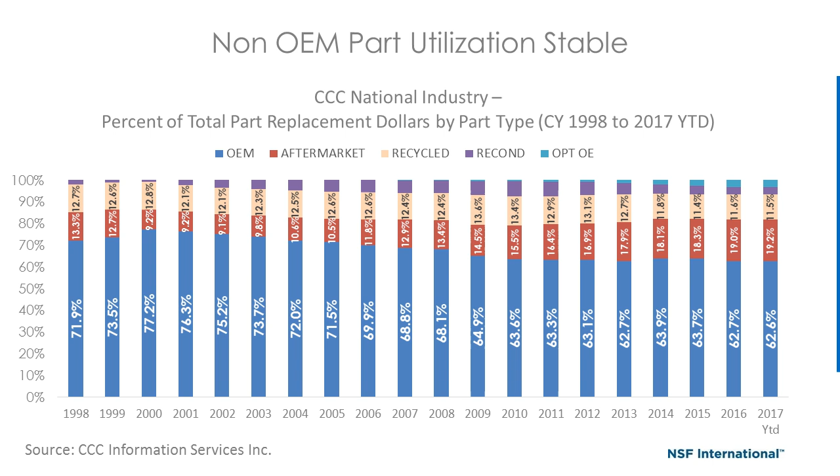So for those of you who don't know NSF, I'm going to do a brief 2-minute introduction. We're one of the oldest, largest, and most respected ANSI accredited certification bodies in the world. I'll talk a little bit more about ANSI and who they are in a bit, but we're a not-for-profit organization. We've been around for more than 70 years, and our ultimate mission is to protect public health and safety wherever we go. We live that mission out by writing certification standards. We have over 90 standards that are published and that we certify to in the world today. For products that we certify, we have testing labs all over the world, and we audit factories and facilities for services that we certify as well.

We have about 2,500 employees, and we operate in over 170 different countries.

NSF used to stand for National Sanitation Foundation. We've been around since the 1940s, right around the time people started eating in restaurants. At the time, there were no collaborative standards for food sanitation, and there were a lot of issues with people getting sick in restaurants. So four professors from the University of Michigan School of Public Health got together and wrote the first NSF standard around food equipment.

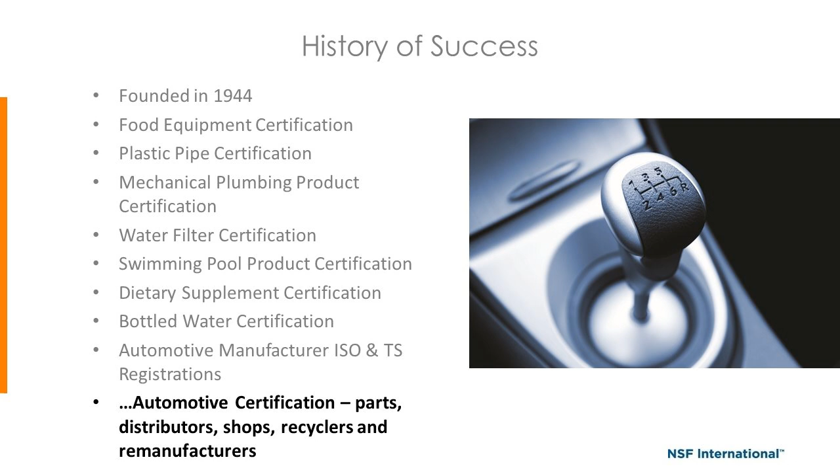One of our philosophies at NSF is really certifying an entire supply chain. That started out, I don't know where the term was coined, but in the food industry we certify from farm to fork. In the same way, we have the same philosophy within the collision space, because at the end of the day we want to assure that consumers have their cars fixed correctly and safely.

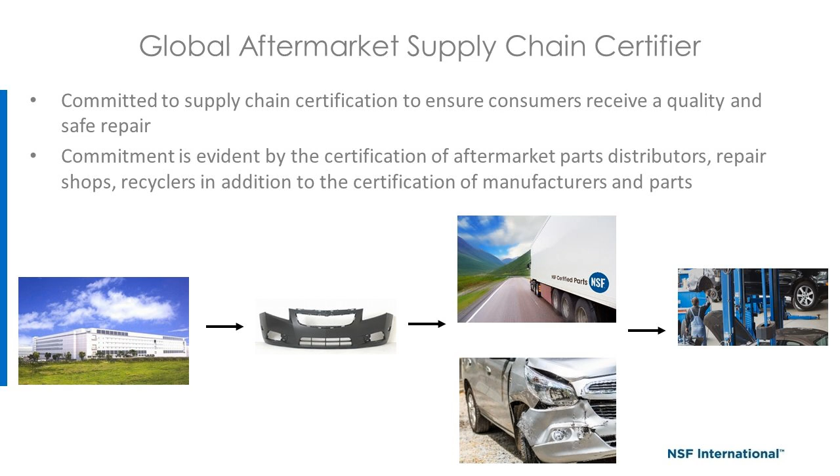It doesn't matter if a car is not fixed correctly because a bad part was used, the wrong part was shipped from a distributor, or the technician did the repair improperly. At the end of the day, the consumer wants their car fixed properly and safely, and the only way to do that is to certify the full supply chain.

The first thing we do before we even get into certification is develop standards that we certify to. One thing often overlooked in a lot of industries is: what is certification? The example I like to give is when I'm interviewing somebody and look at their resume and they've gone to a university I've never heard of. I check to make sure that university is accredited, because I could make up that I have some degree from the University of NSF International, and that won't mean anything because I just made it up. So having an accreditation means something.

In the same way with certification, ANSI—the American National Standards Institute—accredits different organizations. They have to follow certain rules and meet certain criteria in order to write standards and certify products and services. There are a lot of different rules we have to follow in order to maintain that.

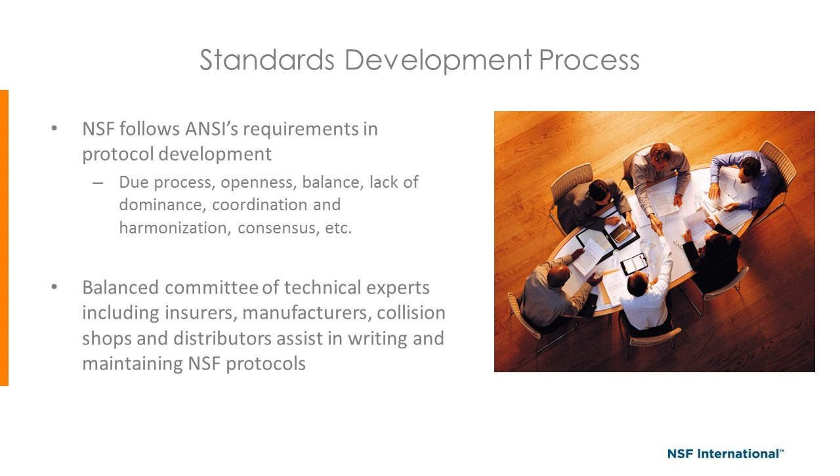When we're developing standards, we have to have an open process. We have to have balance on the committee that develops the standard, so we have industry folks representing the full diversity of an industry come together. There has to be due process and a voting process, where each organization on the committee only gets one vote. Together, the committee comes up with a consensus standard that is used to drive and direct the certification.

Starting with our part certification, I want to quickly walk through what goes into it and what process a manufacturer needs to go through to get a part certified. If a new manufacturer wanted to certify a part, the first thing they need to do is have their facility or facilities approved to make sure they're capable of making parts that will be certified.

A prerequisite is being ISO 9001 or TS certified. It's absolutely vital and critical that they have a good quality management system in place to assure that they not only make good parts, but consistently good parts day in and day out that meet the strict requirements and criteria of what goes into having a certified part.

It's important that we're always certifying parts to be equivalent in form, fit, and function to the OE parts. So it's critical that they have good quality management systems in place.

Once we validate their ISO 9001 certification, NSF will go in and do an additional factory audit to make sure they have quality management systems above and beyond, checking the control plans, checking the records to make sure they're tracking all the different tests required right on the lines where the parts are coming off.

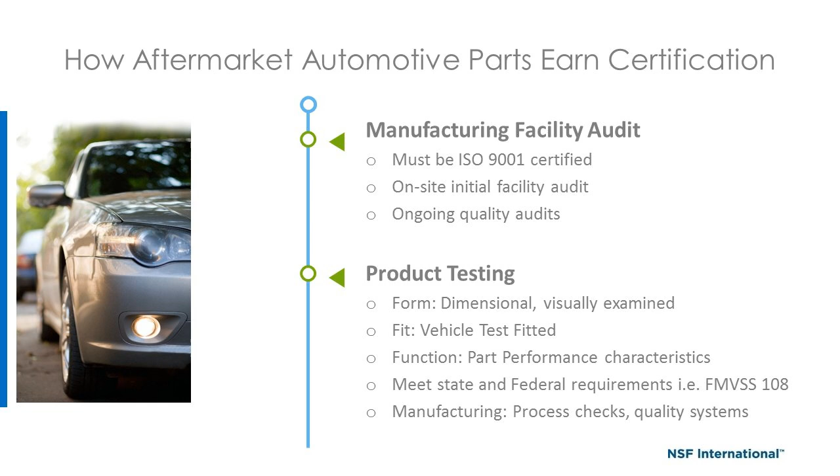Once the testing is completed, all the test reports and audit results are sent to an NSF technical reviewer to make a certification decision. If all the criteria is met, that part can be certified.

Once the part is certified, it goes onto NSF's public listing site, and CCC, Mitchell, and any of the other data providers are notified on a weekly basis so they can update their information accordingly.

In my opinion, probably the most important part of part certification is market surveillance, because anyone who's been in manufacturing before knows it's really easy to make one good part, but very difficult to consistently make good parts on a day-in and day-out basis.

So we do quarterly factory facility audits where we're in the factories again, reviewing the control plans, reviewing all the records being tracked within the internal labs, making sure they're doing all the testing they need to be doing, and when certain things come out of parameter, making sure there's isolation and that parts are being quarantined if they don't meet the criteria and specifications.

In addition, we do in-market testing, where in our Ann Arbor lab we test hundreds of parts that we buy from distributors in the U.S. The manufacturers don't know which parts we're going to select, but we'll buy those parts from a distributor and test them to make sure they continue to meet their criteria.

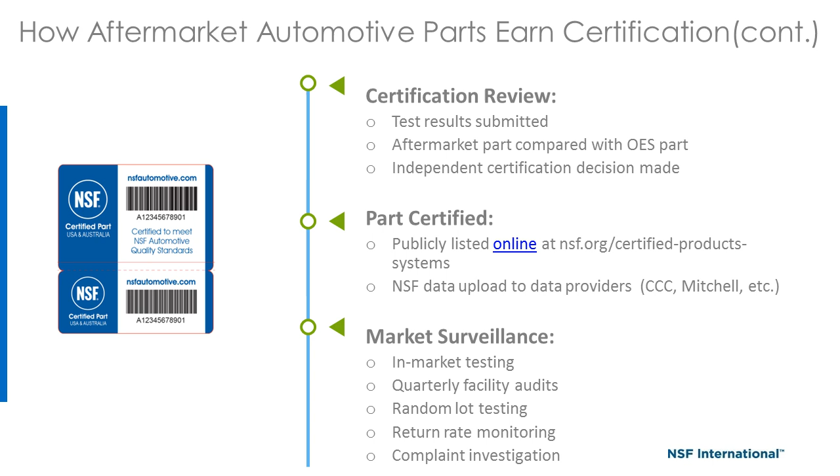We also monitor return rates from distributors to make sure that if anything gets above a 3% return rate—returns related to quality or fit issues—we'll make sure those parts get in-market tested as well. And anytime there's a complaint, we will investigate it and potentially do more testing on that.

Every NSF part will have a tamper-proof two-part label with a barcode that's traceable back to a manufacturer and lot. One of the things we announced at SEMA this year, if you haven't heard, is a new app.

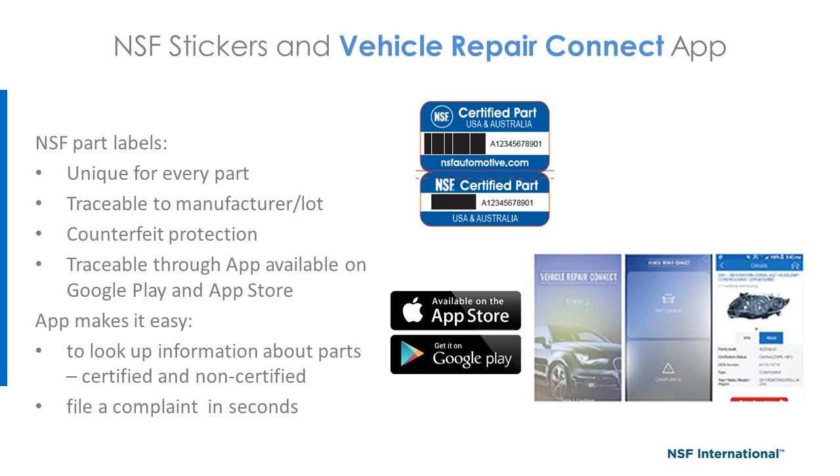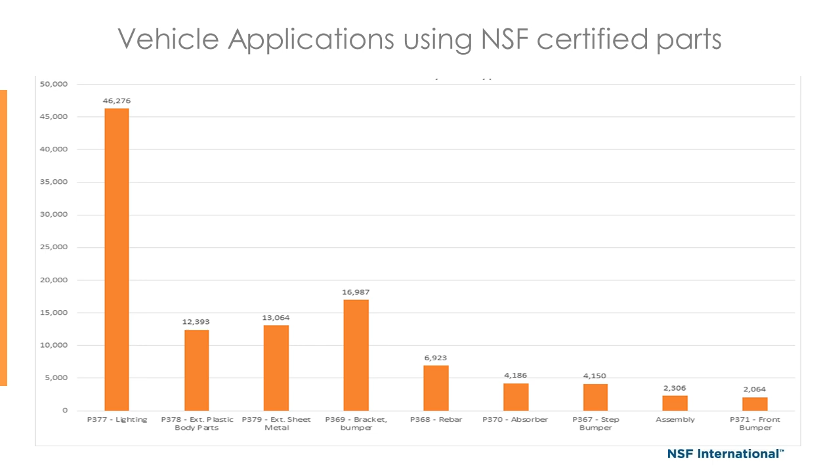Finally, just to highlight benefits of NSF certified parts - it helps the entire industry, all the different stakeholders, just have different options available and drive competition within the industry. Being able to have cost-effective parts that are equivalent to the OE parts makes an impact and reduces the overall severity. It means less cars are going to be totaled going into junkyards, it's going to be more work for body shops, and it really provides a high-level service for everyone that's involved.

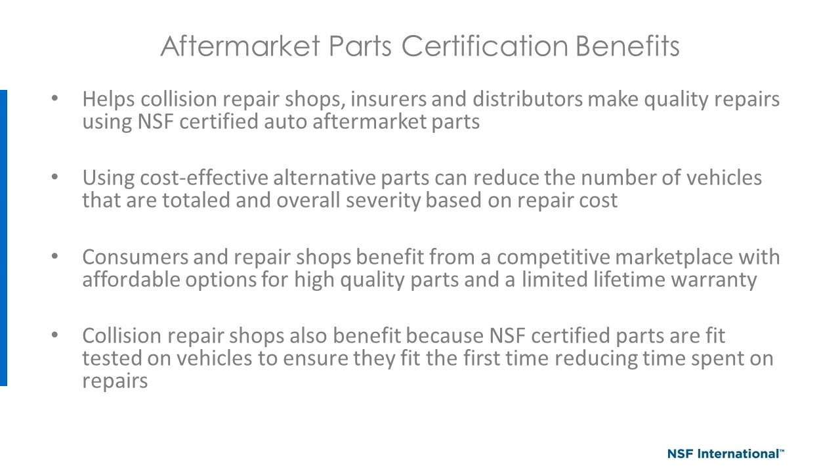Something new that we've found, that we've been looking at over the last year, maybe year and a half, is that the NHTSA FMVSS rules were written over 40 years ago, and at the time the average age of a vehicle on the road was between 5 and 6 years old. So the rules for the lens coating and lens durability was 3 years. What we've seen happen now is the average age of a vehicle is more than double that - it's in that 12-year mark.

What we're seeing some of the OEs starting to do, and some have already done this, is that even though the NHTSA laws haven't changed, they've taken it upon themselves to go to a 5-year coating. So we want to be proactive and do the same thing. We want to make sure we always say that the parts are equivalent in form, fit, and function to the OEs. So starting this year, NSF certified lamps will all have a 5-year coating on them.

One of the things to mention is that when we did a cost analysis on this, it's literally pennies per lamp in cost. So there should not be an additional cost seen anywhere in the supply chain with this, but it should be an added benefit and help the headlamp's durability improve by 60%.

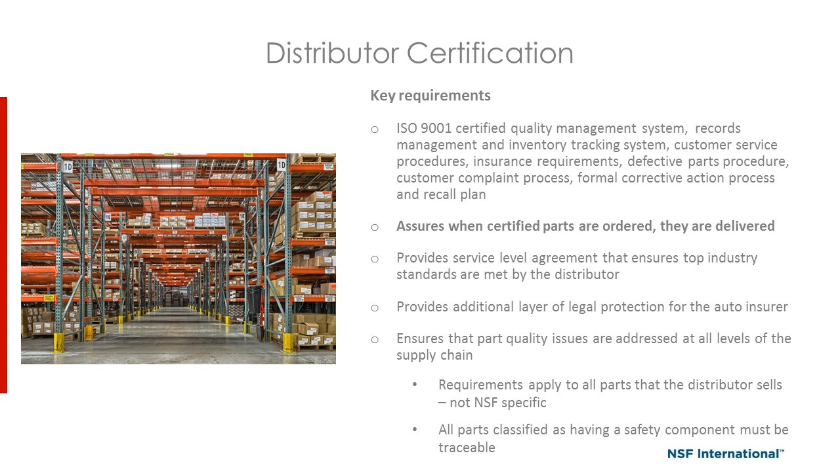We also want to make sure that there's a level, if in the event of a recall were ever to take place, that the distributor has a system in place to be able to track that and to execute around a recall.

I think everyone is aware of and very sensitive to this John Eagle Collision Center case that just took place at SEMA. That seemed to be all that anyone was talking about. It's unfortunate, not getting into specifics or taking sides, but one thing we see on our radar is there's going to be a lot more 'ambulance chasers' out there and more sensitivity around that. So if you're not working with NSF or another organization like NSF for shops, it would be worth being sensitive to that risk, people waiting to jump on something whether it's there or not. Having that extra layer of defensibility is something to consider.

That's really what NSF Repair Shop Certification is all about. We want to make sure shops that earn certification provide a high level of quality repairs and excellent customer service. There are three certification types a shop can earn depending on what they do: cosmetic, structural, or aluminum. The audit really focuses on in-process inspections, making sure the shop has the right training and equipment, the right customer complaint process, but the emphasis is on the actual vehicles, making sure they follow OE procedures and are returned to the customer in a safe and reliable way.

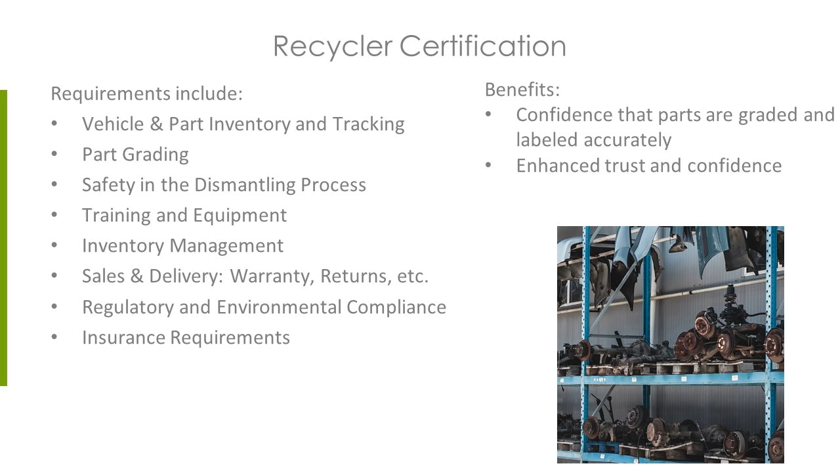We will be launching a remanufactured parts certification program. The first part group we'll certify facilities for is starter motors. Other part types will be available for remanufacturers to apply for in 2018. Let me be clear though: we're not certifying the actual remanufactured parts, we're certifying the facility doing the remanufacturing. They need to be ISO 9001, showing a good quality management system. Every part remanufactured at that facility must be tested and evaluated before resale. Parts are fit tested, looked at and evaluated for appearance to meet different criteria in the standard. Any moving or replaceable parts like bushings, gaskets, O-rings, or lubricants need to be replaced. The core is the part that can be remanufactured.

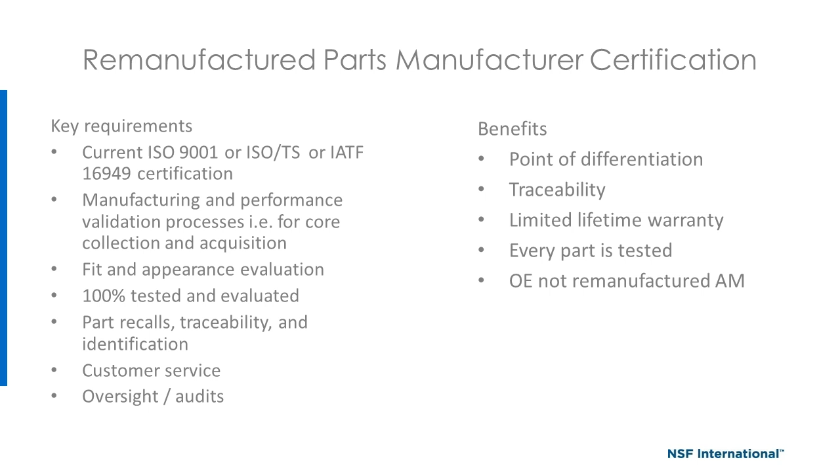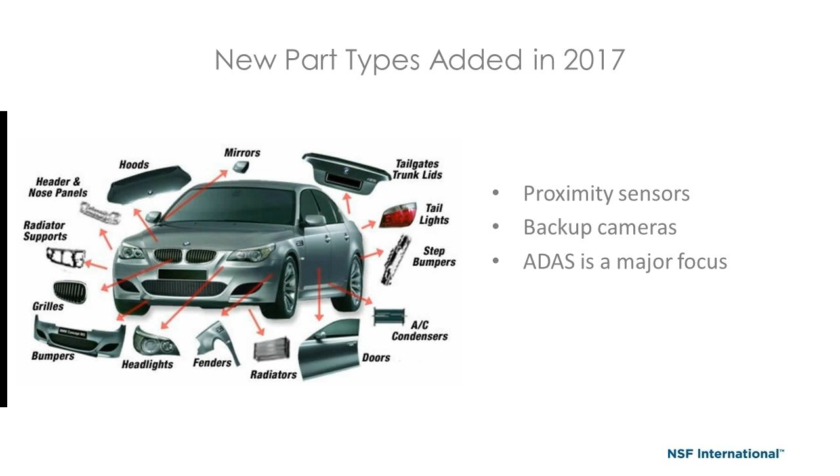In 2017, with all the advancement of ADAS technology, we launched two new certification programs, one for proximity sensors and another for backup cameras. There will be others coming out in 2018 that we'll talk about in the next webinar.

With proximity sensors, there are NHTSA rules and tests required to make sure they're safe and work appropriately, and we test according to those standards. Each factory needs to be audited annually to make sure their quality system requirements are being met. There are physical wear and tear tests, and fit and connectivity tests are done afterward, to make sure the sensors still function in extreme cold, humid, or potentially corrosive conditions. Besides appearance and connections, the NHTSA tests also look at range of detection, response time, and communication as part of the requirements.

There will be a limited lifetime warranty on certified sensors, and they will all bear the NSF mark and be listed on NSF's site. We've received a lot of questions about when we're going to start seeing certified proximity sensors, and we hoped we'd have them by now. Unfortunately, this is new.

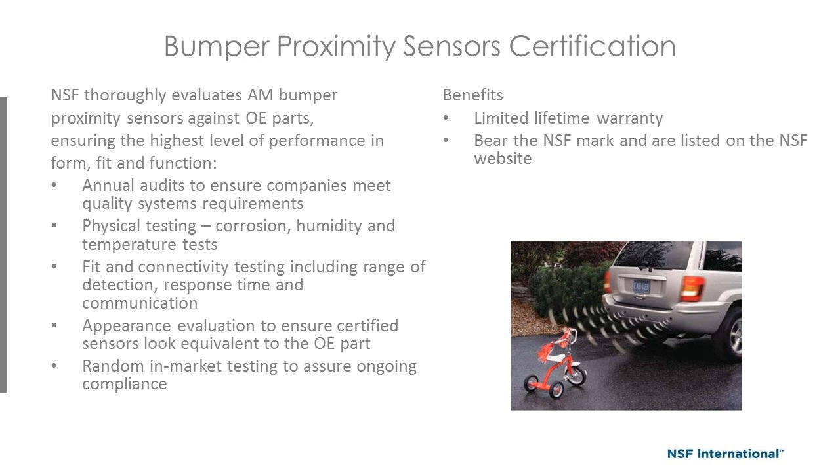For backup cameras, the requirements are very similar to proximity sensors, where you go through your appearance evaluation, you'll do the fit and connectivity tests after the physical wear tests, and again, it's testing against the OE and to the NHTSA requirements.

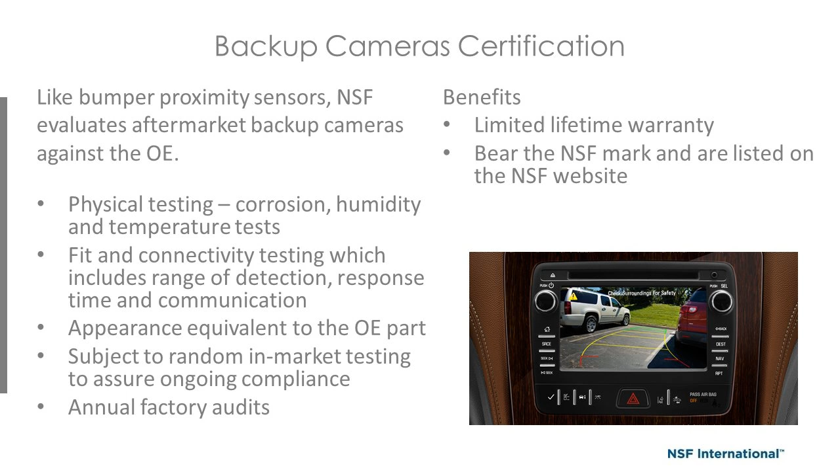NSF has a registration program for certain part types to pass FMVSS NHTSA testing requirements and be evaluated for fit and function. Some of the part types I'll talk about are mirrors and TPMS. The difference between certification and registration is that registration is a much less expensive alternative to certification. It doesn't include in-market testing, and it doesn't involve factory audits. What we're validating is that the design of a part meets certain testing requirements, and we would register a part once it meets those different requirements. So there's less risk mitigation, but it's faster and a less expensive alternative.

For mirrors, we test according to FMVSS 111 requirements. We'll test for field of view, reflectance, mounting, marking, and curvature. We'll also do a vibration test to make sure there will not be blurriness in the mirror, that the glass is seated properly, and check blind spot detection. The other feature we check for is that if an OE has a certain feature on it, like a turn signal light or a defroster or any other feature, we make sure the aftermarket part has that same feature as well.

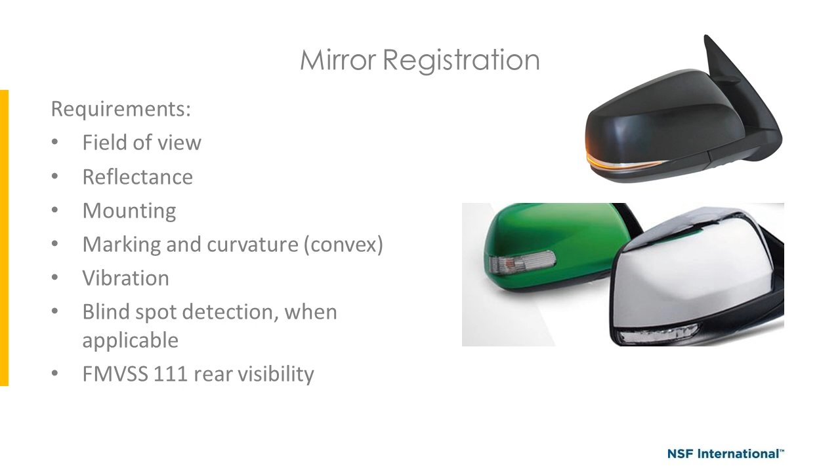Similarly, for tire pressure monitoring system sensors, we test according to FMVSS 138. It's really looking to make sure the sensor ID writes for sensors with cloning capabilities, that the sensor is accurate, that it's reading and registering properly, and that it syncs with the particular protocol, links up and syncs with the vehicle in a timely manner, as outlined in the FMVSS requirement and guidelines.

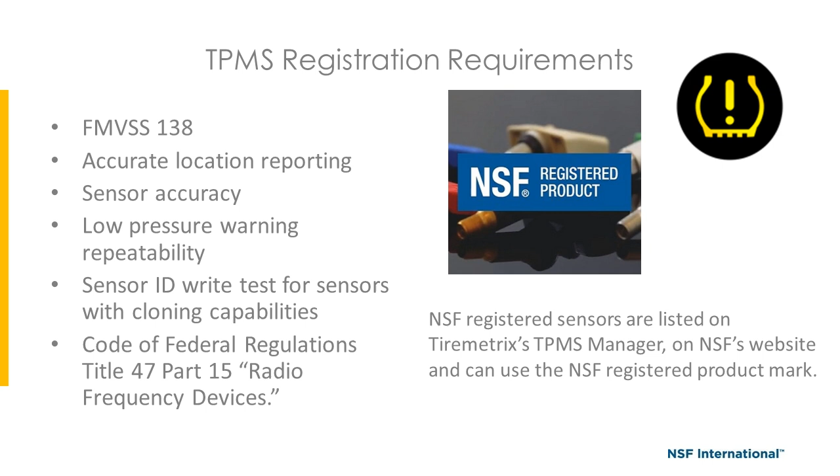Looking ahead in 2018, we'll be launching a certification for radiator supports. There will be other part types and other certifications that we'll also be announcing, which we'll talk about at the next webinar.